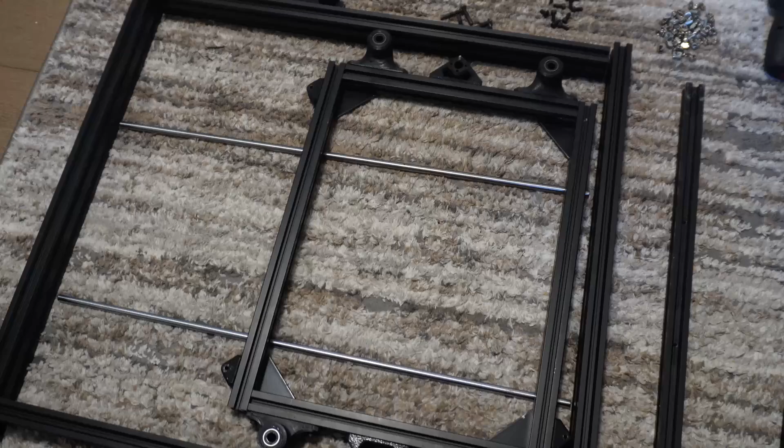Okay, this is day 3 of VZ330 laser cutter. And today we have a dilemma. I've been researching what laser cutters can cut. And regarding plastic, it's basically about nothing. I should have done this research a long time ago.

But acrylic you can only cut like 3 millimeters. You can only cut black acrylic or some opaque acrylics. Polycarbonate releases dangerous fumes, and then anything else is a no-go really. The diode laser cutters are really only good for cutting wood and thin sheets of plywood.

So I've been thinking about, instead of building a laser cutter, we build a CNC. Now CNC would require a more robust frame, which is why I got the Ender over. That thing has some 4040s on it and some more 4020s. So the goal is to build a CNC, because the majority of parts I want to fabricate are going to be polycarbonate, and really it's just going to be polycarbonate.

So the goal is to build the CNC without buying any additional parts, because as soon as we buy parts, we get outpriced by this thing. The 3018. This thing is $200. And I can't let myself get beaten by this thing. This thing uses NEMA 17 stepper motors, with the same lead screws that we have. So I think it shouldn't be too hard to build this, but maybe just slightly larger.

This option, I could probably just adapt one for one on the Ender, and I wouldn't really have a problem with that. On the Ender, all you have to do realistically is just hard fix two of these 2020s on the frame, and then that would be pretty much it. The bed would be the same, but you would be stuck with a 235 by 235 bed, which is all right. It's not the best. So I want to see what I can figure out with the Vzbot frame.

So right now I'm thinking of using the two 8mm rods as the support. I could realistically, if I wanted to, do 3, but then I need to buy another set of bearings. But I don't want to buy anything for this, because we're already $110 down. No, we're already $200 down from the miter saw and then the components. But I can return some of the components because we're not building the laser cutter anymore. So yeah, that's the goal.

I'll do some CADing and I'll think about how we can make this into a laser cutter. Sorry, into a CNC. So I was thinking 2 linear rods here. Then we have the 2 linear rails on both sides that we can just take from the gantry. And then we can have motors on this side with a simple belt that goes across the linear rail. I'm not sure how effective belts are. The 3018 only uses lead screws.

The thing I like about this a lot is that there's only 2 lead screws, 1 and 2. Well, no, there's 3, but you can ignore that one. That one is for the z-axis. But for this scenario, if I wanted to make a Core XY version, I would have to mirror it on that side. I would need 2 linear rails, 2 sets of motors and belts, which I do have, but it's just more complicated. Yeah. And then I would still need a way for the x-axis.

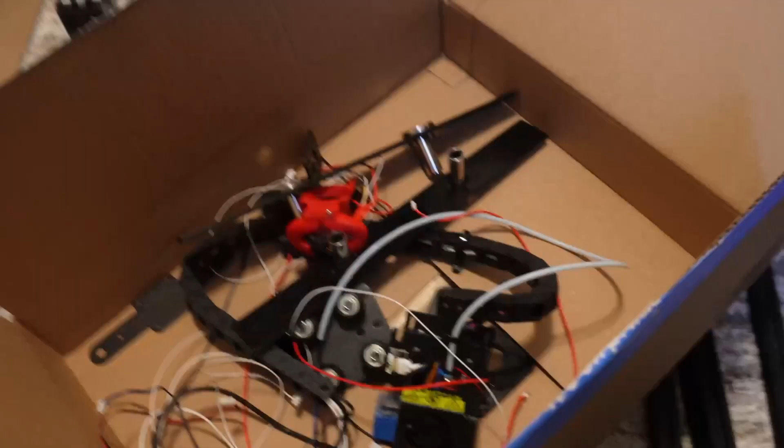All right then, I'll think about it a bit more. I got a bit of parts from, this was the original Tronxy X5 SA before it got converted into a Vzbot. So we have the original bearings for the linear rods, and then most importantly we have these Open Builds

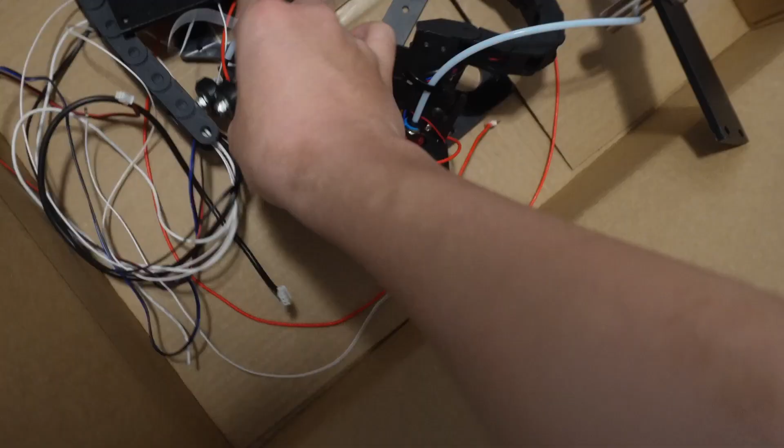Open Builds V rollers. I think we might have to use this for the X gantry for whatever CNC we're building to save costs, because otherwise I would have to get 2 sets of linear rails to move forward and backwards, which is gonna be like another $50, which is a fine cost, but I don't want to spend any more money on this. We have 4 sets of these. I'm actually missing 2 wheels on this.

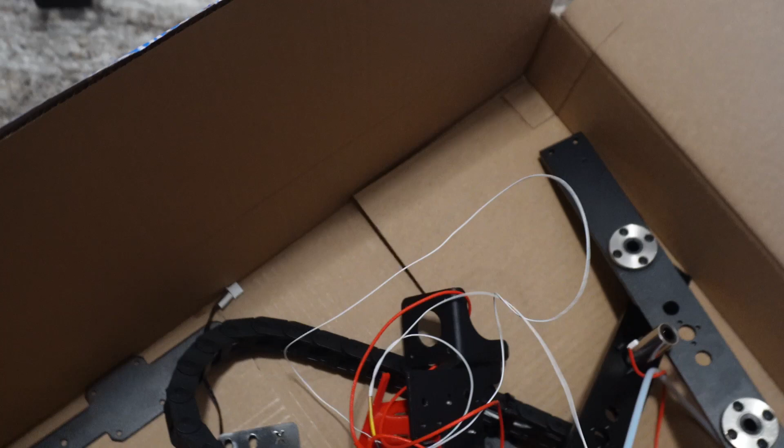It's funny to me because my entire life in 3D printing has always been to reduce weight, reduce gantry weight, and make the gantry as flimsy as possible, in order to increase acceleration both ways. But now I'm trying to, these things were built for a reason, because these are pretty sturdy. But I obviously didn't like them at the time because I wanted something more lightweight. So yeah, I'll see what I can do with these parts.

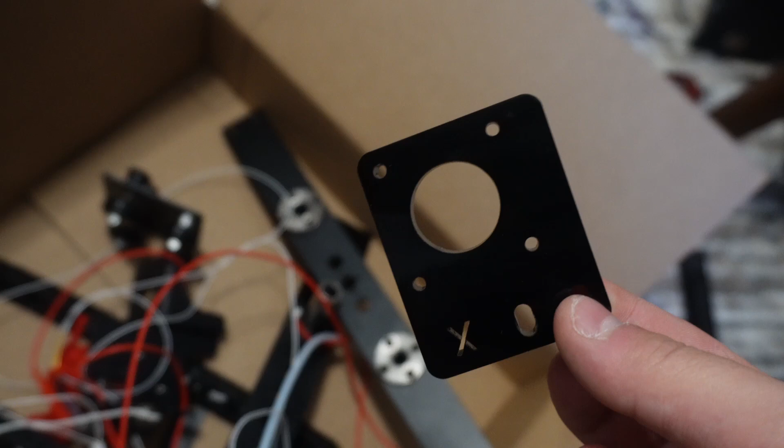We also have these, I think these are acrylic motor mounts from the Tronxy. These might make a comeback. So we're just building a Tronxy again. That's gonna be fun. Alright, I'll see what I can do with these parts.

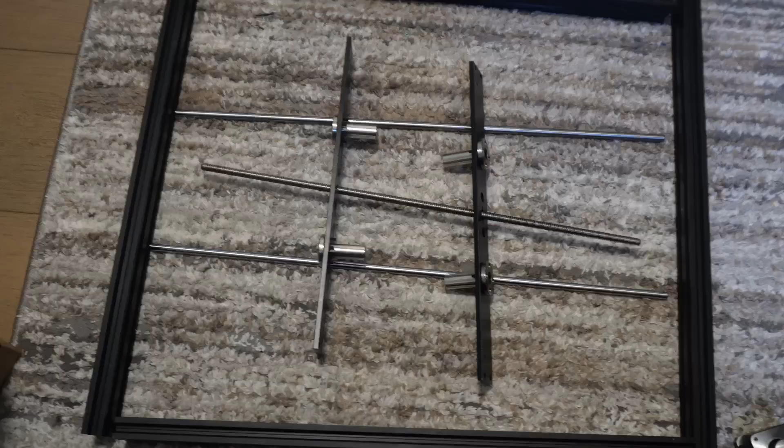Okay, so this is a possible solution where we use the 2 Z-axes from the Tronxy and add that onto the linear rods. But I don't like this solution. This is like reminiscent of a Cartesian. It is a Cartesian at this point because the bed slides back and forth. But that means that it's incredibly inefficient in space because essentially your frame has to be 2 extra bed widths. Otherwise your bed can't be milled the entire way. So I think we're gonna stop here and just decide that we're not going to do Cartesian.

So at that point, then the question becomes, what do we do instead? And to be honest, I have no idea. Well, the only other option besides Cartesian is what I talked about before. It's that we have 2 linear rails, one on this side, one on this side, driven by motors with belts, because I would need to buy lead screws or ball screws if I wanted to go that way. I think if I'm just milling polycarbonate, belts should be fine. That's what I'm hoping. I have no experience with this. And then we can have another motor over here that's just the same thing. This is just a normal gantry at that point.

And then for the x-axis is where things get interesting. We could either just have 2 of these 2020 extrusions, or we could use the rods. We could have the bottom and top rod set up like that. Or what we could also do is have 2 of these extrusions also set up like that. That would be interesting. And then because we have 2 sets of those V rollers, we would get 2 sets of extrusions. And if you could find a way to combine those V rollers, yeah, that might be a feasible idea.

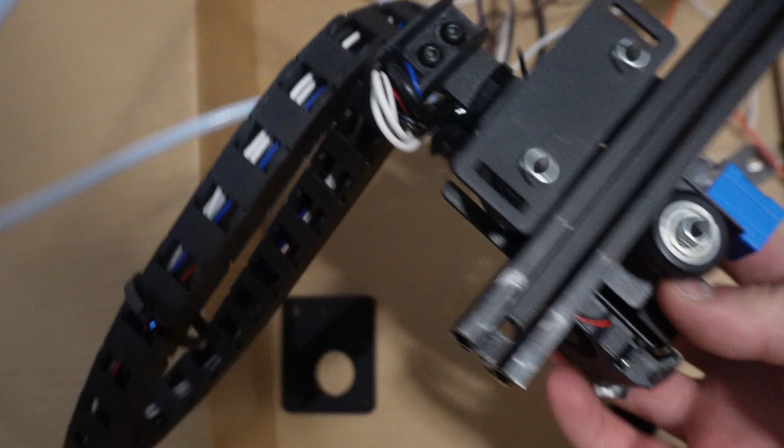And then belts. Belts would be pretty easy on V-rollers because you just slot them. I think there's just a slot, if I remember correctly. Yeah, on the Tronxy there's just this slot for the belts. And then we would just not do Core XY because Core XY is a pretty bad idea on CNCs, because the more belts you have, the more flex you're gonna give. Which is not really an issue in 3D printing because you don't need that much torque. I think that might be the idea.

For the Z-axis, it's gonna be really easy. We just take one of those stepper motors, and then we just put one of those toothed, not idlers, toothed flanges on them, and then have a mini belt that goes to the front and have a lead screw that moves the tool head up and down. But I think I'm going to start CADing this design. It seems like a pretty good design to me.

If you do a quick estimate of how much build area we're going to get with this, let's assume that this is as far as we can go. But then realistically, the spindle's going to move it forward around an inch or 2 inches. And then side to side, we also have that. So this is just going to be side to side space that we cannot mill. So this looks like to me that we're going to get about, that side is around 15 inches. This is going to be 15 by 14 inches ish. So not bad. That's acceptable.

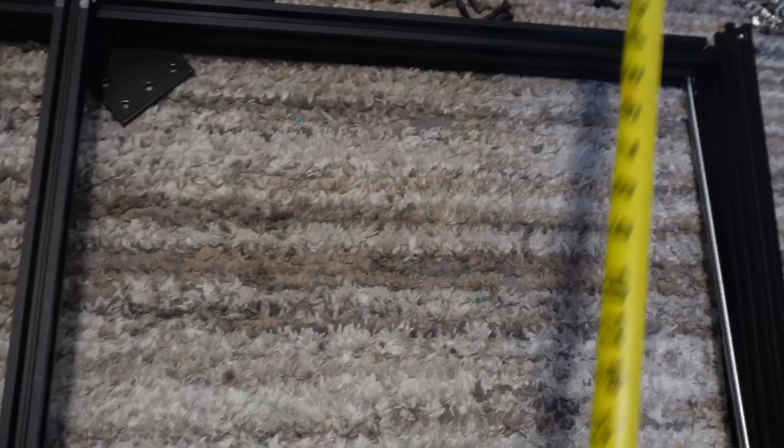Because we're really going for small form factor here over speed or bulk. Because again, we're only going to be milling polycarbonate, and maybe some other plastics, but not metal, and not wood either. So I think we should be fine. With plastics, you have to go fast. You have to go fast, otherwise the plastic starts melting.

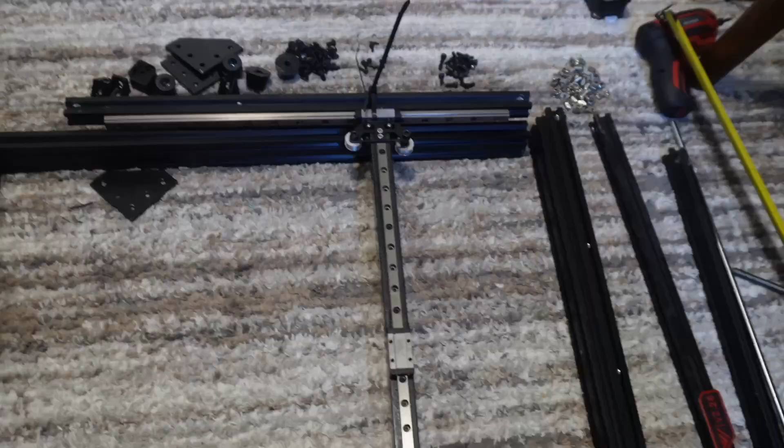Now, this is going to be a lot of work if I wanted to redo the entire gantry, because that's one of the reasons I wanted to stay on the VZ platform, is that I already have the gantry made. So what I'm thinking is, we finish building the gantry like I intended to. At most, I think we can replace the carbon fiber gantry with just a 2020 extrusion again, and see how the rigidity on that thing is, because I really do not want to redo the entire gantry. That seems like a lot of work.

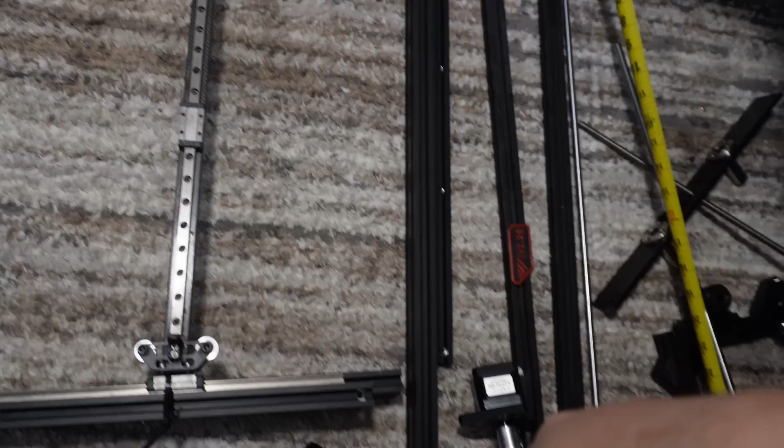I think I figured out an acceptable amount of compromise. So I'm gonna use a 2020 extrusion to replace the carbon fiber that's on the gantry right now. I'm gonna remove the MGN rail, and I'm gonna put one of those V rollers on it. That should give me more stability in this gantry. Now, the other part of the compromise is that I have to design something that would allow the belts to work on those V rollers.

I think that's a pretty good compromise. I don't have to redesign the entire gantry. I just need to figure out how to get V rollers on there. Secondly, I think I'll take a play out of Vzbot's playbook, that instead of making the frame really rigid, I'll try to find a way to make the spindle really light. But still there's going to be vibrations and stuff, but I'm thinking already of just having a NEMA 14 or smaller motor than 17s to be controlling the Z-axis.

Why is it phantom zooming?

Something like that. I don't know. We're just going to put that on and see if it doesn't work. Then we'll find other solutions. Then we might actually have to go the full CNC setup with the linear rods. And these are 8mm rods. So if we really wanted, we should probably get 12mm rods. But again, I don't want to spend any more money on this. So I'm going to get that replaced. CAD it out first. I'm going to find what spindle I'm going to use.

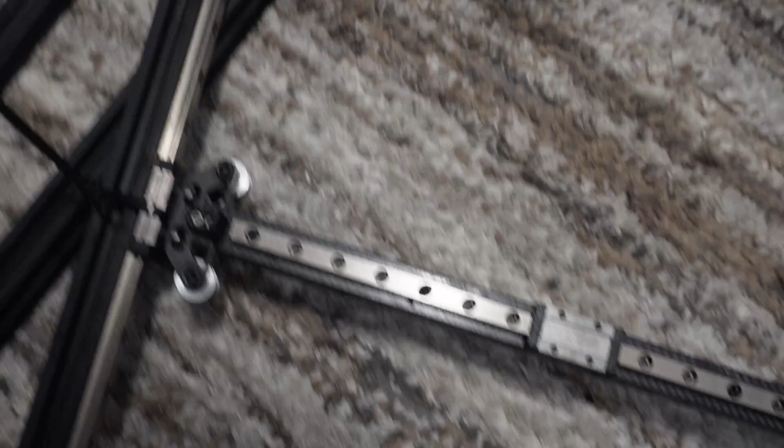If I really wanted to, I could upgrade this to an MGN12. I think I have the parts for it. I have an MGN rail on the Ender over there, and I could probably find a block somewhere. But yeah, so the main hard part right now is choosing a spindle and how I'm going to do the Z-axis. There is an option that I'm looking into where I just do not do the Z-axis, but I don't know how I would mill stuff with that. So, yeah. I just spent the past 30 minutes staring at this thing and thinking.

Okay, so each time I was talking about keeping the Vzbot gantry, I forgot one thing, and that was that we actually need a Z-axis mounted on the gantry. So I have two options right now. I can either go back to a laser cutter, which would be easy. I already have the CAD for it. I just need to cut these extrusions, and then we have a laser cutter. But then, what good is a laser cutter if it can't cut anything I want to cut?

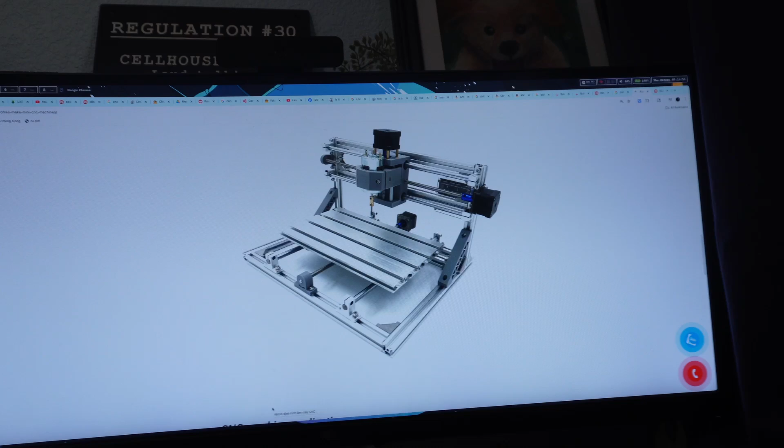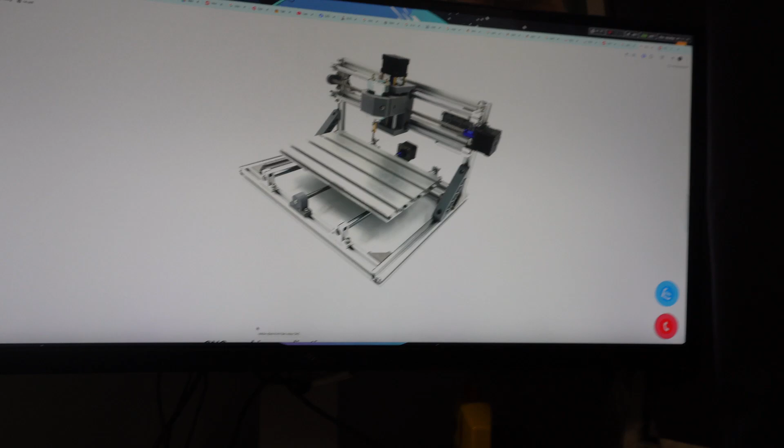So I have some inspiration from this. This just looks like a CNC built from 2020 extrusions. But I think the way to go on these machines might still be either fixed gantry or, as I said before, where the gantry moves. Again, I don't really like these types of fixed gantry mills, because your build plate has to essentially go double. No, it doesn't. Does it? So you start at that. No, yeah, it does, it does. Your machine has to be at least twice the size of your build plate, which is just stupid.

So I'm thinking about a gantry design again. So we have these motors mounted to plates which I could design, something like that. We put these two MGN12 rails on the side here. And then this motor obviously controls that, and then we have the same motor on this side doing the same thing. And then we have a gantry design where I think I'm just gonna go 1020 extrusion like that. And then that's gonna be 3D printed, the plates bolting the linear rails to that. And this should be a really easy design because it's just a belt.

And then on the X-axis itself, like how the Ender 3 has it, it's probably going to be something similar. I'm not sure how I would route the belts, or where the motor would be.

And that's kind of important, so we kind of need to figure out where the motor would be. We could have pass-through holes on the plate where it's mounted, because I'm just thinking about mounting it with these holes on the side.

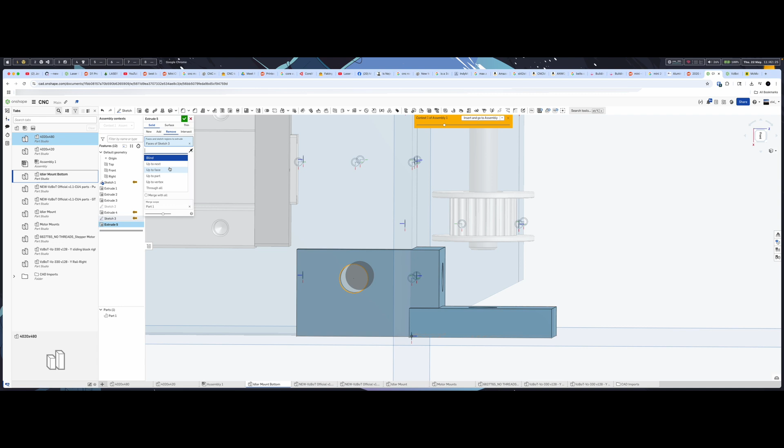These 4020s have a gap in them, a hole in them that's all the way through. So we could actually use that to route the belts, so that half the belt is inside the 4020. We have the linear rail for both Y-axes. Yeah, Y-axes at the side.

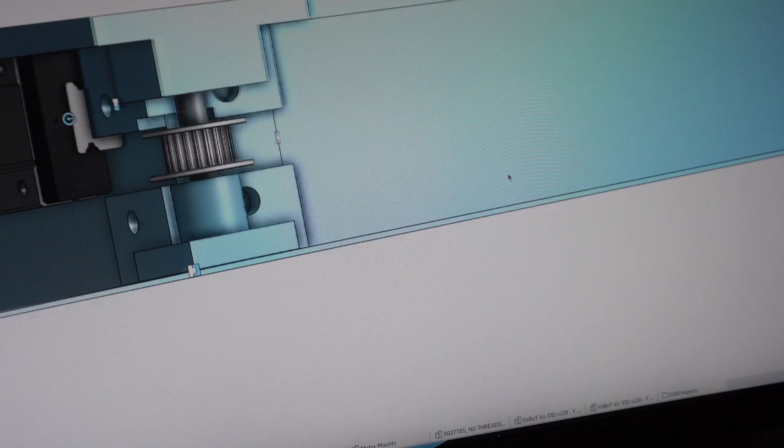And then we have a pulley assembly that looks like absolute trash right now, especially this, like, what even is this? But it's okay. This is a proof of concept. And then the linear rail, obviously. And then I'm gonna design a riser for this so that we can actually mount the X gantry and the X gantry motors. But this looks like it's coming along pretty well.

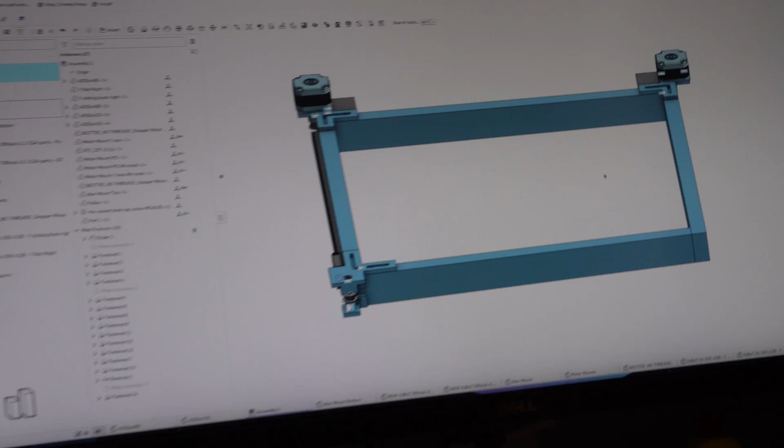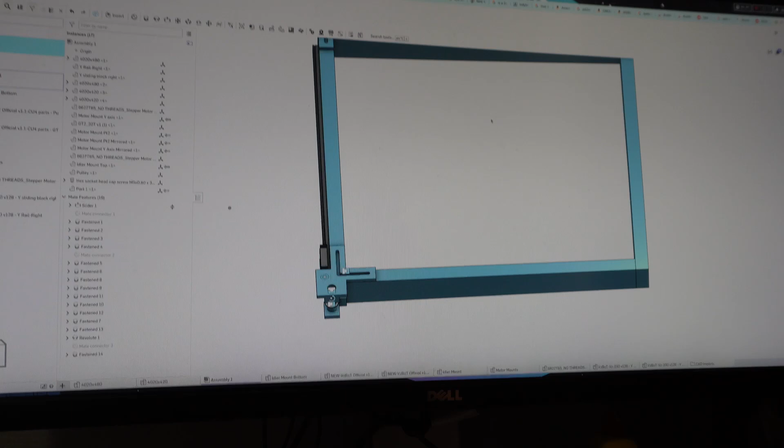This should work. In the worst case, this is just a glorified plotter, which is also nice. The good thing about this design that I really like is that everything's externally mounted, for better or for worse. So inside we have more or less the entire build area, or a very small loss, maybe like 2 centimeters off each side. So yeah, I haven't done this side yet, but this is a prototype. I'm gonna print these parts out and see if we can assemble them.

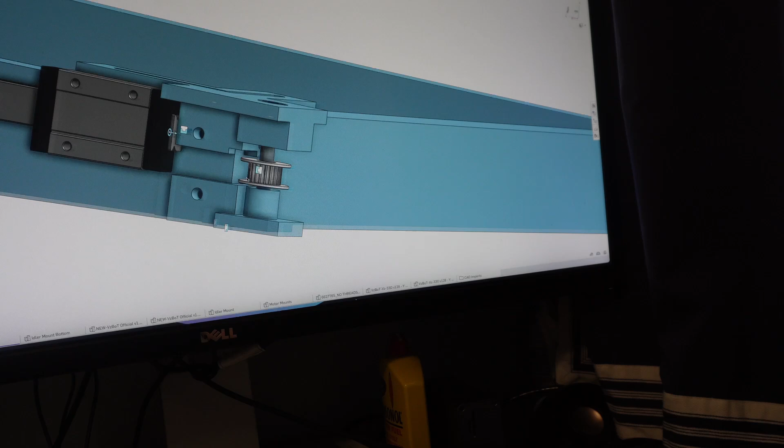And this CAD is absolutely obnoxious. What even is this? All right.

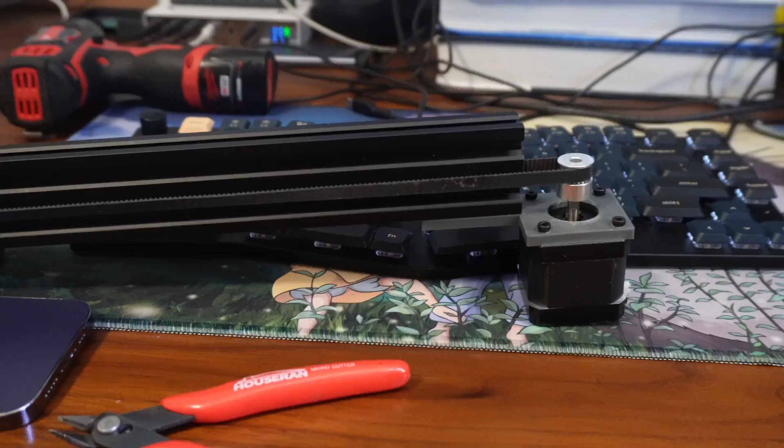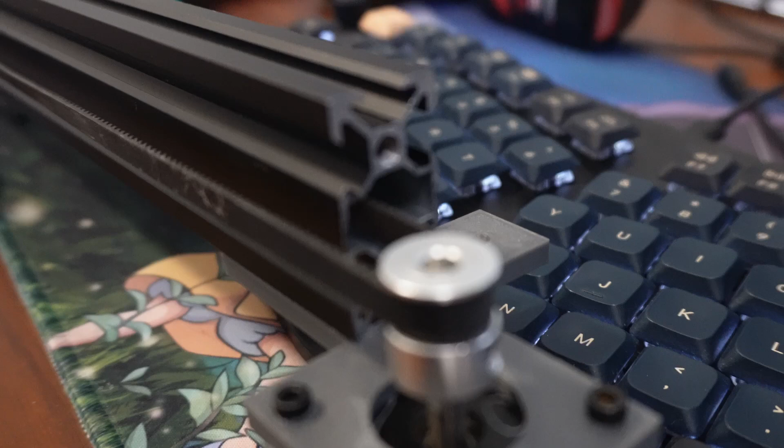So we'll get these printed and I'll get back. Okay, so we have it assembled and printed. This is upside down right now; the motor would be upside down. But we have the belts running across the entire outside, and this is where the rail would be. The belt runs through inside the C channel. Not the C channel, inside the 40 by. Let me zoom in on that.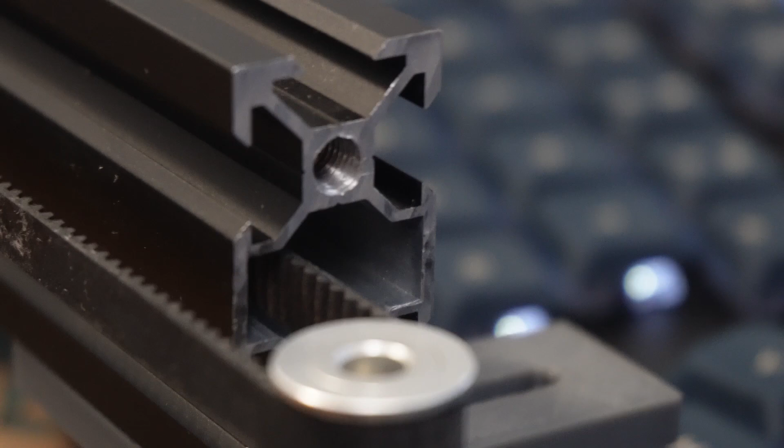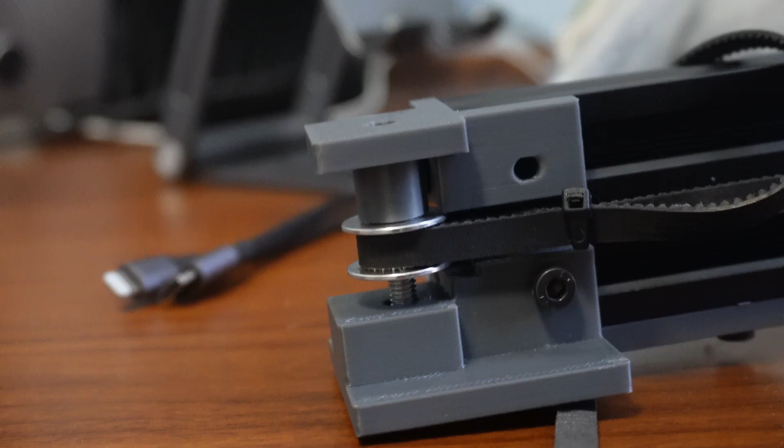There we go. So there's a slight tolerance between the edge of the extrusion and the belt, but I think it's going to be okay. And this runs all the way to this part. This is going to be the front, which is just an idler. And then in the middle will be the rail and then mount points for the belt. Right now I just have it zip tied up. So this is pretty good, actually. I thought this tolerance would be a lot worse, but the belt runs pretty smooth through the entirety of the rail.

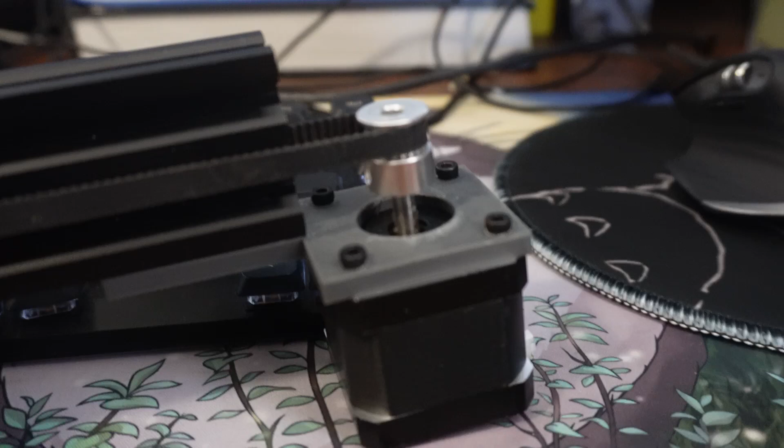Yeah, so now I'm going to design the X gantry holder for the linear rail MGN12 that's going to slide on this axis. And we should be good. This is a very nice proof of concept. It is now 3:34, so we've spent the past 3 hours designing this thing.

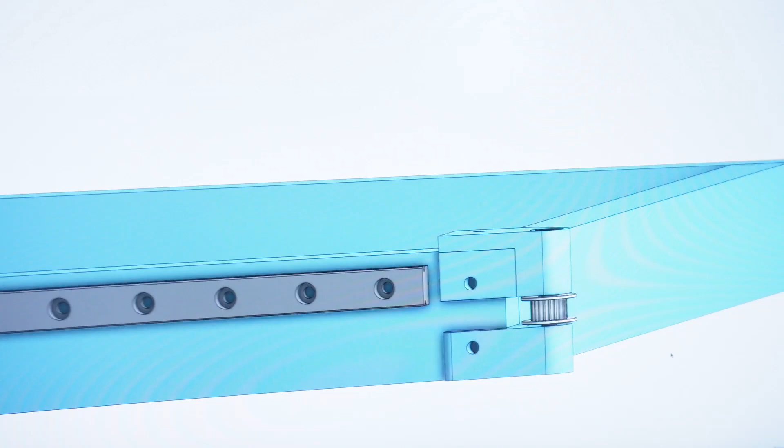This is version 2. What's new about this is that we have integrated spacers onto the idlers to make sure there's not as much flop. I also reduced the size of these, but version 3, which is getting printed right now, will reduce that size even smaller. It's just going to be a simple little round piece, and this will make it much more compact than this.

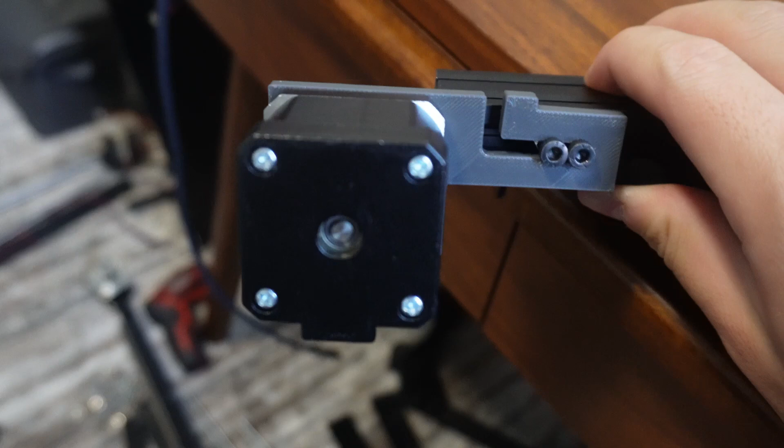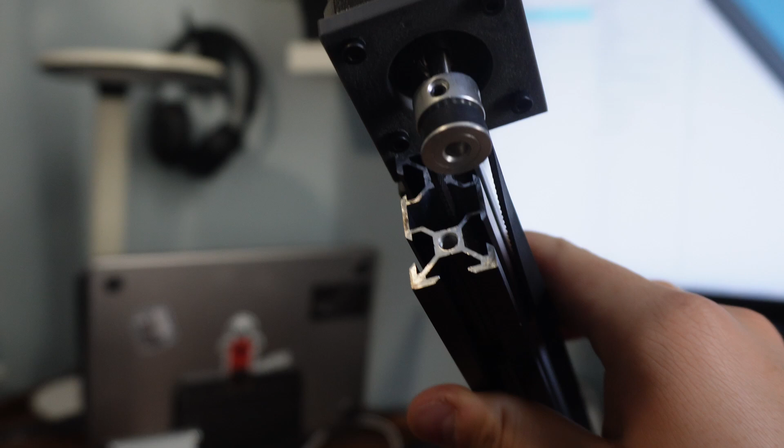In the front, version 2 doesn't differ that much in terms of the motor. I obviously fixed the issue where the hole was too small for the motor. We have more travel along the tensioning range. But the biggest difference is that I shifted the entire motor 2 millimeters to the left, so we have a lot of clearance between the belts and the inner extrusion.

So as you can see there, yeah, there's a lot of distance now between the belt and the inner extrusion, so it won't be rubbing against it the entire time. So now we get this.

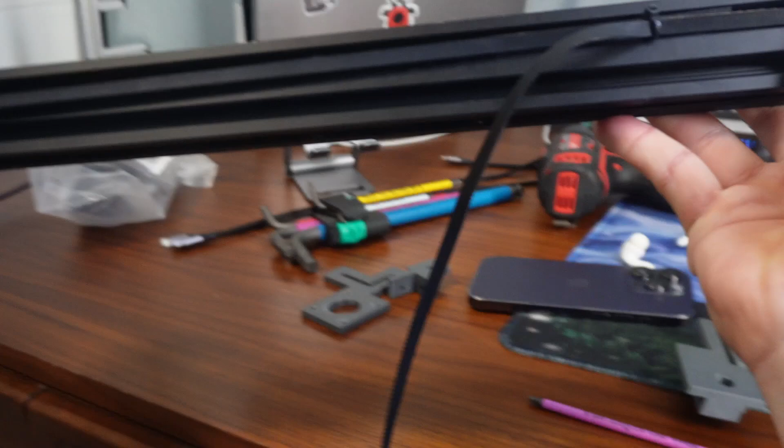The only problem with this revision is that this is too tight for the idlers. I had a tolerance of 1 millimeter in the CAD, but for version 3 I changed it to 2 millimeters, 1 millimeter on both sides, because this is too tight to get any movement. You can still get movement, but it's just not very smooth.

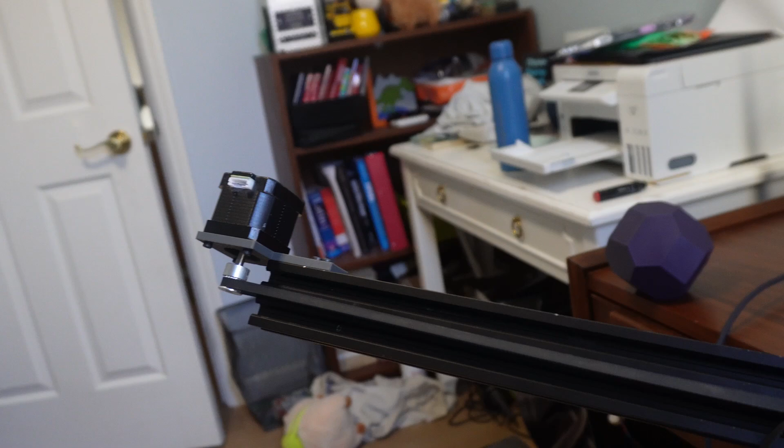So yeah, so far it looks very promising. I think we can definitely build a light CNC out of this with like a mini spindle. It shouldn't be that hard. This will also give us approximately the same speed as a Core XY, because it's not that much different. Still two motors driving the gantry. If anything, we get more speed because we have three motors on the gantry instead of two. But no, there's no way we're getting more speed because the Vzbot is way lighter. Never mind. And I can either stop here today, or I can continue CADing the linear rail things.

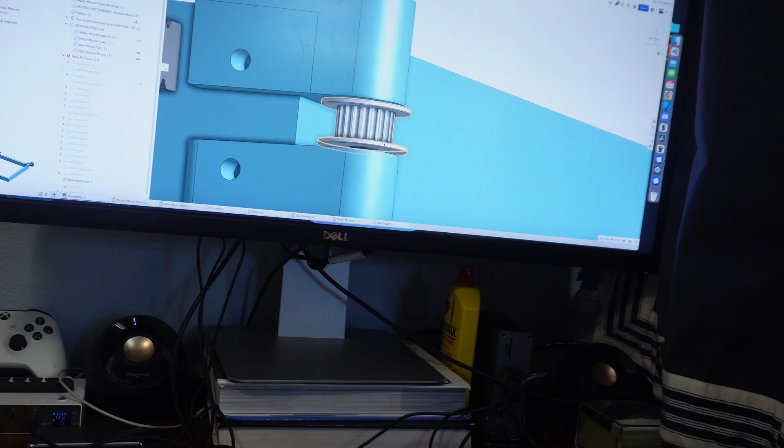I think I'm gonna wait for version 3 to finish up, and I'm gonna clean this mess up, and then I could get a prototype gantry out. I think the gantry will be the easiest part, because this is hard primarily because I need to figure out spacing within the extrusion to route the belts. I wanted to do that because it makes it really compact. Look how compact this thing is. It's just that, and that's an entire motion system.

So yeah, it's progress. And we eventually do need to cut down the 40/20s. I haven't decided what length I'm going to go to. But I think until we have a full CAD done, this is about as far as I'm going to get. Yeah, so this is looking like we probably need, I want to say, 2 to 3 more days to finish this project, which is a lot. And I haven't even ordered spindles yet or figured out electronics. Electronics, I've been looking into it, and so far everyone's using an Arduino Uno, but there's someone who made a Klipper mod for that.

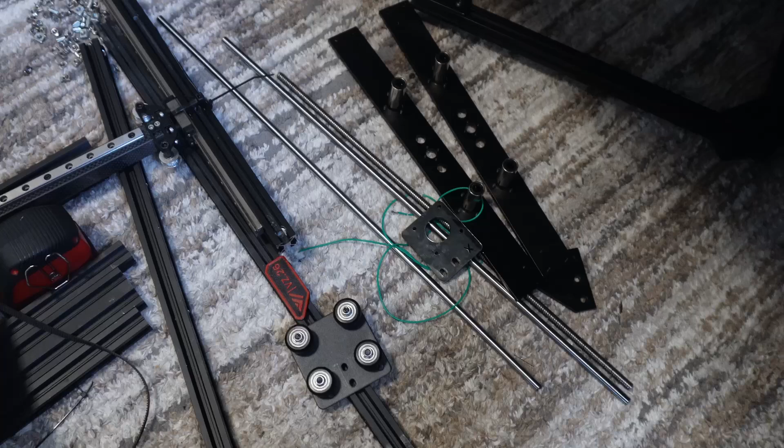But yeah, so no lead screws, fully belt driven. Though I shouldn't say that. I might use lead screws for the x-axis. Lead screws plus V-rollers. I don't know how well that will work out because normally V-rollers are used with belts. Or I could go lead screws plus those LM8UU linear rods. I don't really like linear rods. Linear rod assemblies are really bulky, like the one on the Prusas, because you have to have the entire printhead basically wrapped around those two rod bearings.

I think I would prefer just, you know what? We could just strap a 40/20 on there, that one from the Ender. We could just put that on the x-axis and have V-rollers going onto it. Or we could have both. We could have V-rollers around the extrusion, and then we can have two linear rods around it. Yeah, we could do that. I think that would make up for our lack in rigidity. I think that's a viable option.

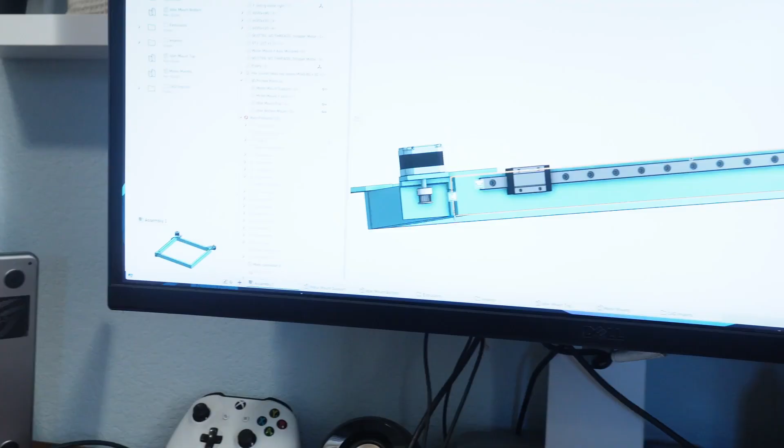So in the middle would be the extrusion, and then on both sides, on the top and the bottom, we just mount it like that. And since I'm designing whatever plate this attaches to, I can totally incorporate that. The plate is going to be really simple. It's literally going to be a single flat plate, adapting the holes on this thing to the belts, which are just a notch. So a notch, the belts run through here, and a notch here, and then wrap around, and we tie that with a zip tie to secure the belts. And then it goes upwards to just support the rods and the gantry.

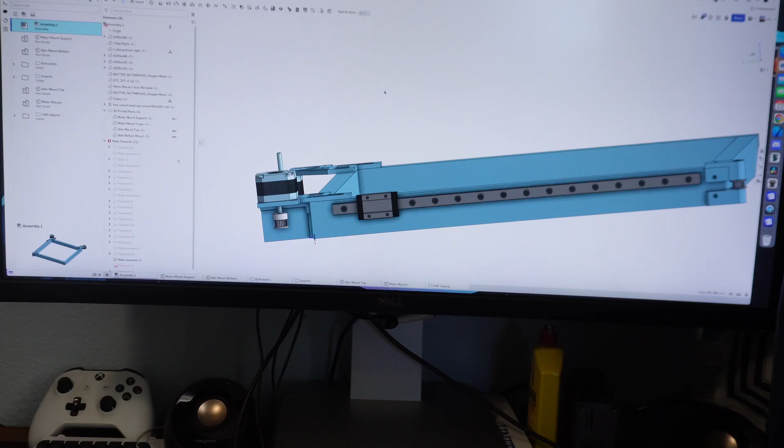If we're doing lead screws, figuring out motion would be really easy because you just mount a motor on each side of the block. With how many stepper motors I have, I could probably do 2 motors coupled on the x-axis. I don't know how beneficial that would be, but I have a lot of these cheap motors because the X5SA came with like 4, and I replaced all of them with LDOs. Yeah, that's totally feasible. And I have motors from the Ender that are still left over. I could make use of those. Yeah, I'm definitely going to look into V-rollers plus the rods for increased stability.

You know what we could do? Most people would just have these in a single line, so that these are all in line with each other. But if you offset them, that gives you more structural rigidity because then you're constraining more degrees of freedom. I think that might be the way, because these are really thin rods in the world of CNC. I haven't decided on what spindle I'm going to go with. I think I'm just going to buy the cheapest one on Amazon, which is like $30.

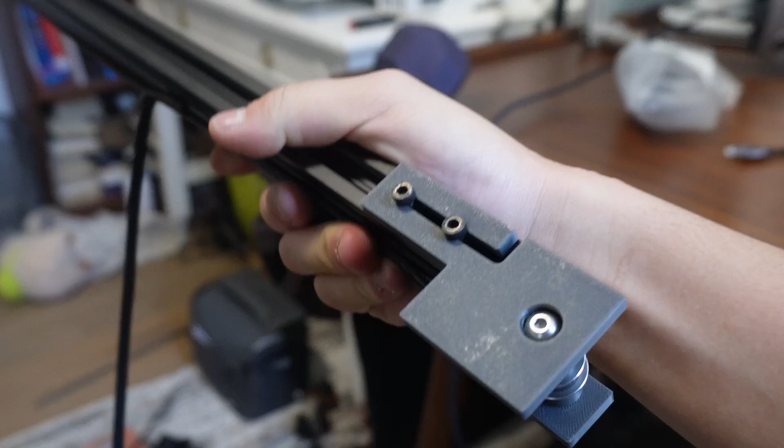Yeah, this is looking very viable. I really like the way this turned out. I can't wait for the version 3 to be printed with the more compact idler mounts. I think this could be great, because this is what drives the entire ender system. The main thing I'm worried about is weight.

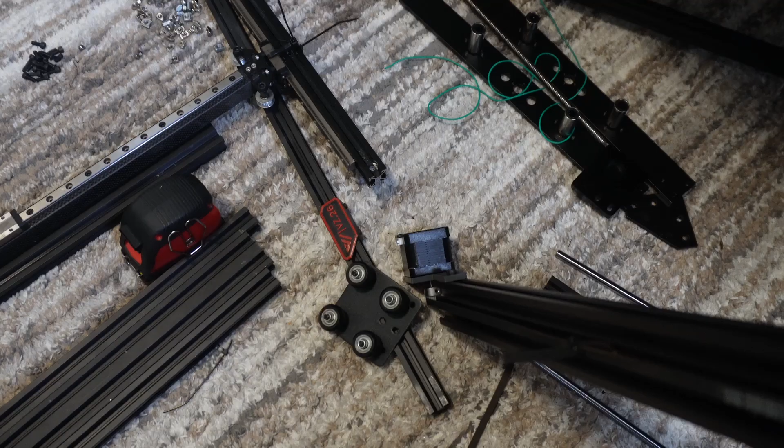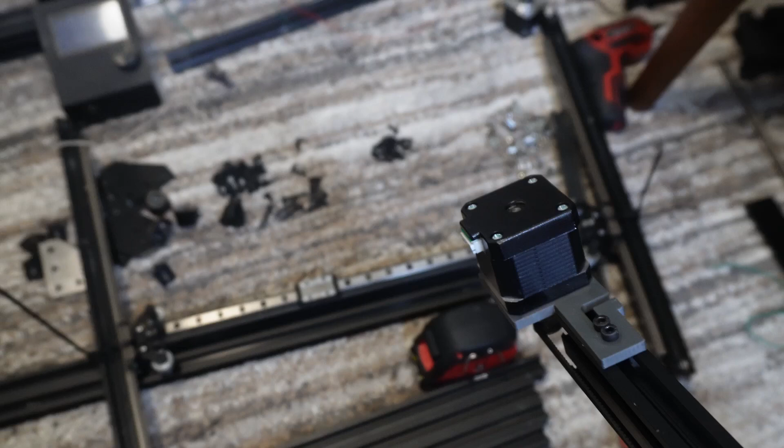Are these belts and motors going to be able to accelerate that gigantic load if you put this on there? I might need to buy more steppers. I might need to look into NEMA 23 like 50mm steppers. These are not the ones I'm going to be running, by the way. These are just the Tronxy ones. I might run this on the x-axis or the z-axis.

But for the z-axis, I'm actually looking into putting one of those pancake stepper motors on there, like the ones from the Orbiter, or there's another NEMA 17 stepper that I could put on there, because those are way lighter than this. Yeah, we actually have one here.

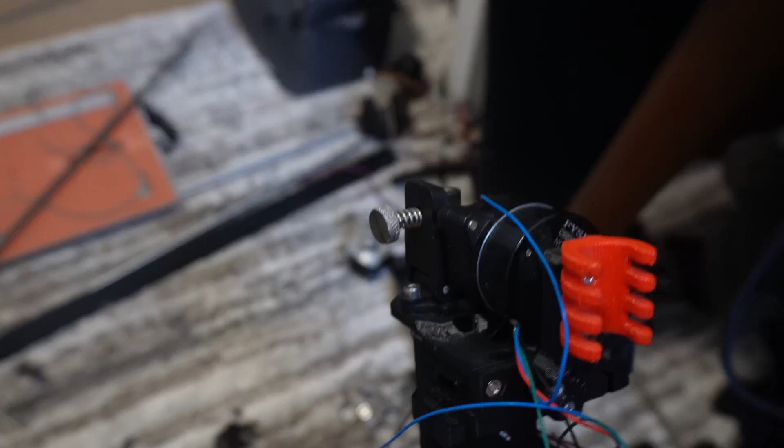So we could put that stepper on there, because all the stepper does really is just move a 500-ish gram object, maybe 700 grams, up and down. And not constantly, but like one time per 5 minutes based on my feed rate. That's what I'm thinking for the z-axis.

For the x and y, I'm going to be using the LDO Speedies, because those are going to carry most of the weight down these two gantries. X gantry, if it's a lead screw, won't have barely any weight on it, because the router head is going to be way lighter compared to the entire gantry.

Oh, I might not need V-rollers. You know what? I could use the carbon fiber again. I could do carbon fiber plus those two linear rods. That would save on weight, and yeah, that's a brilliant idea. First ever carbon fiber CNC gantry. It's gonna snap in 2 days, but I really like that idea. I might go with that.

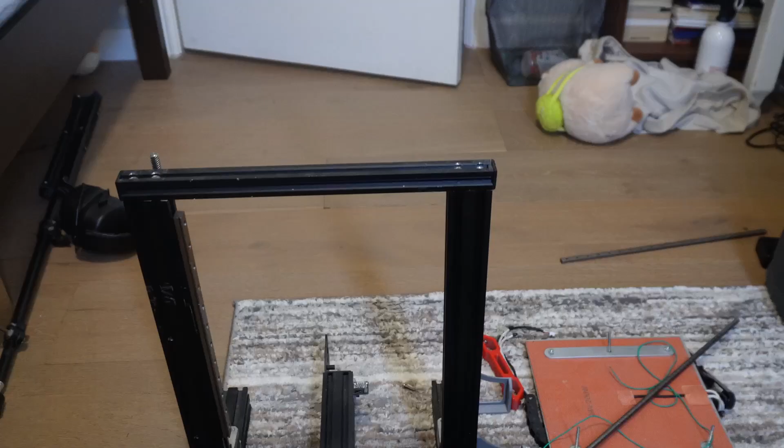Okay, so today we're going to be de-anodizing these black anodized aluminum plates. We're going to do this with some sodium hydroxide solution. So here we have sodium hydroxide, otherwise known as lye, used in making soaps. Sodium hydroxide is corrosive, obviously, that's why we're using it to de-anodize. So we need a plastic container. This is made of polypropylene, but high density PE would also work as well.

Just be careful to avoid glass, because sodium hydroxide can etch glass. Though if it's just for a while, it would probably be safe, because it only etches it at like a few microns per minute. But still, it will react with the silica in glass. So always use a plastic container. So we're gonna make around, I want to say, a 0.5 or 0.2 molar solution of sodium hydroxide. But I'm gonna clean this container first. It's very dirty.

Just gonna drop a piece in. You should see some bubbling happening very soon.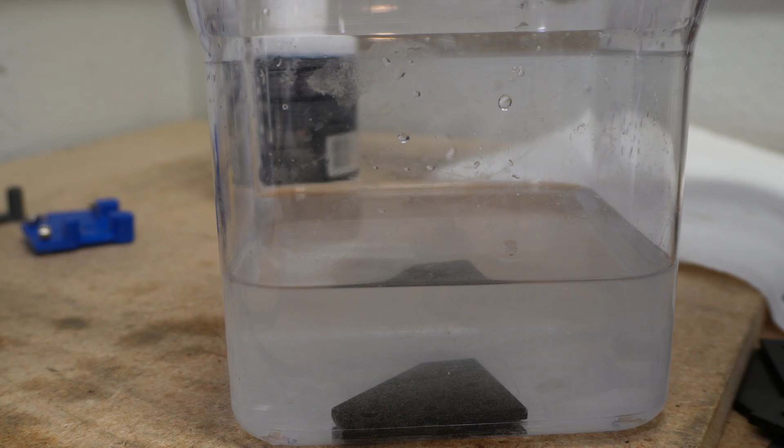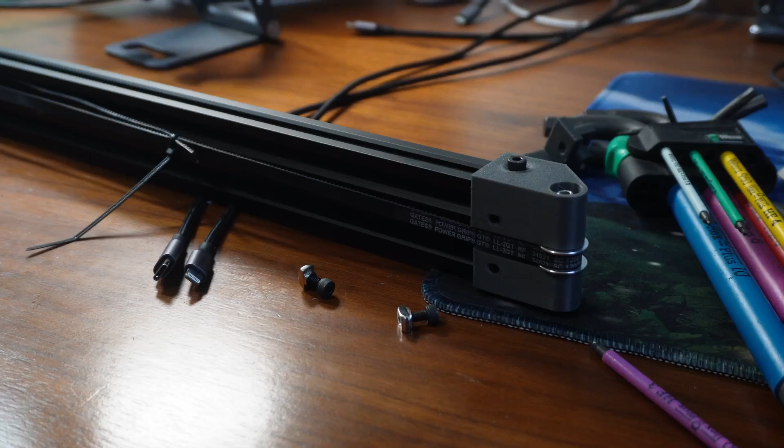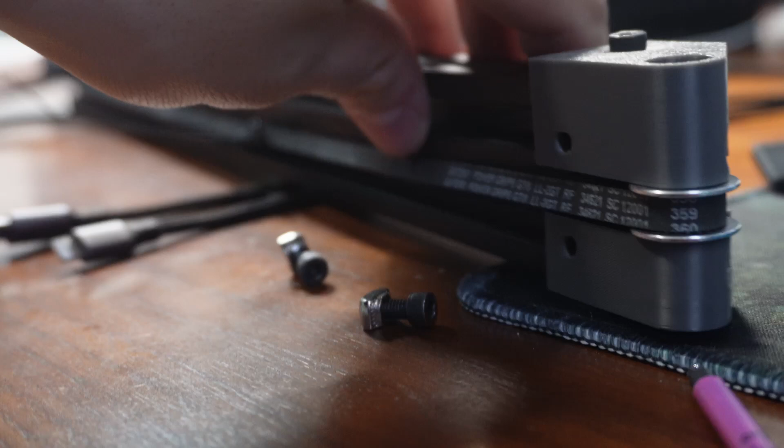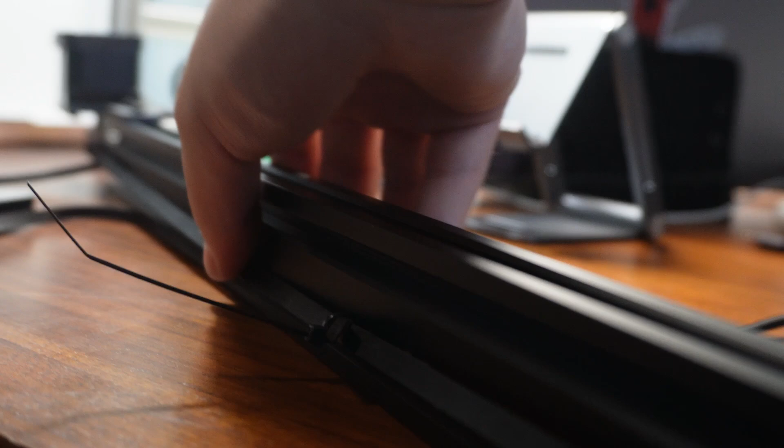Okay, so this is version 3 that I have printed. The main difference is that we have the really compact idler system that moves really smoothly as well. I fixed all the tolerance issues in these two spacers. So this is good. I really like this design. And then we have a nicely spaced belt path down the middle of the extrusion with great clearance on both sides, and it's perfectly centered in the middle. And on this side, for the version 3 motor mounts, this added brace really helps with the torsion of this entire motor mount.

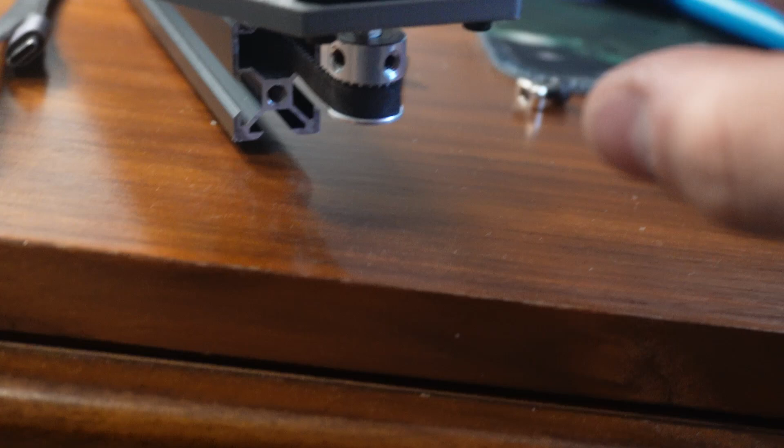And don't forget, we still have the bottom supports down here that I don't have printed because I don't have an X extrusion yet. But I am extremely confident in this motor mount. For the final revision, right now this is at 5 millimeters thickness. I'm probably going to make it 8 or 9 millimeters thickness, and that will be more than rigid enough. Actually, this is already rigid enough with the added brace, but thicker will make it structurally more rigid.

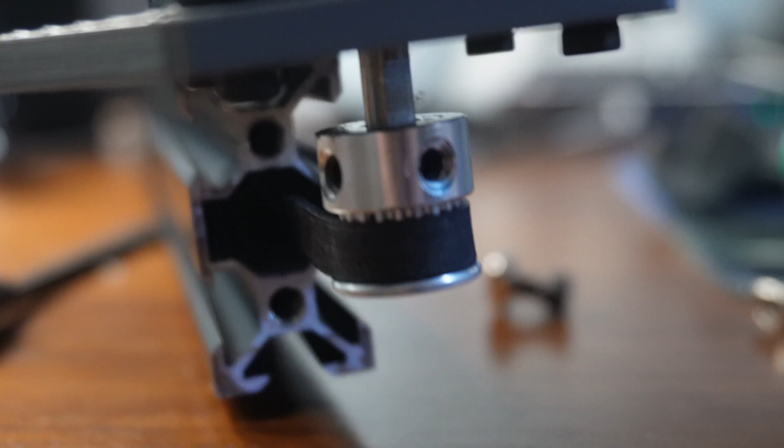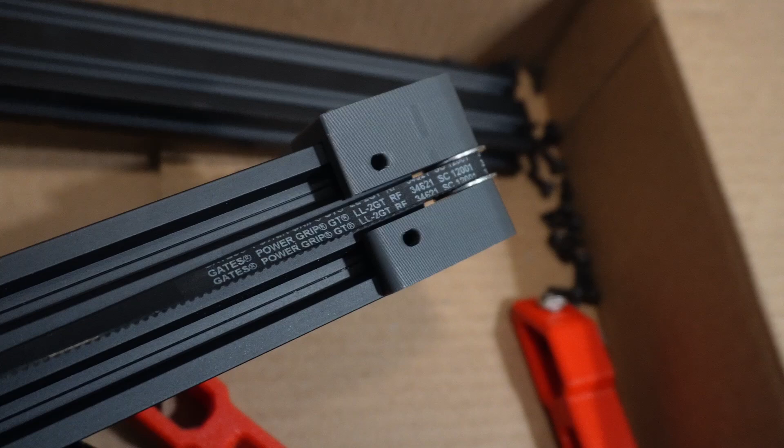I really like this belt path. This is extremely clean because it goes all the way through the extrusion, and only one side is exposed. So it's a really compact motion system, which is always good. This gives us more space internally for milling. So yeah, this is the current state of things. I am still really impressed by this idler mount. It's gorgeous.